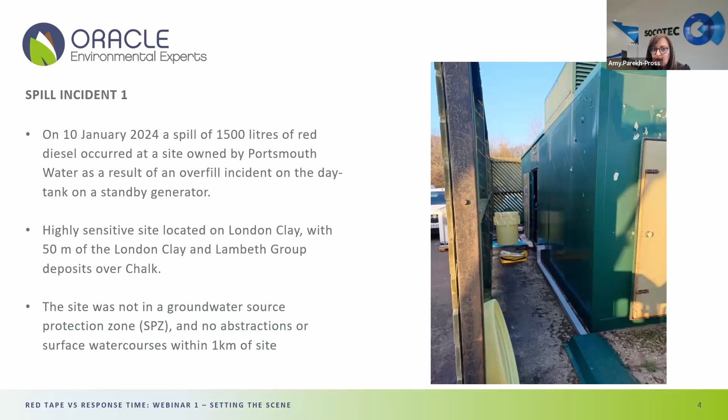So that's a lot of diesel. I mean, we've dealt with bigger, and I'm sure Adrian has too. But it's big enough, and because the site is so sensitive, it's a real issue, and you need to get rid of that diesel as quickly as possible. And I guess because it's the London clay, it's going to be contained probably a lot in those services. So it's just running away. That's exactly it. And on that particular point, the approach has to be breaking that pathway, getting interception trenches in, getting sumps in, so that you can actually start recovering that diesel as quickly as possible.

So we did pretty well in the early stages. So 630 litres of diesel actually recovered from direct pumping from trial pits and interception trenches while we're carrying out that work. And obviously, as you're uncovering that diesel and breaking those pathways, we're installing sumps that allow us to then carry on. Go back into it more. Exactly. So it allows us to then recover diesel and diesel contaminated groundwater as well. So after the first few days, we're left with 770 litres of diesel unaccounted for.

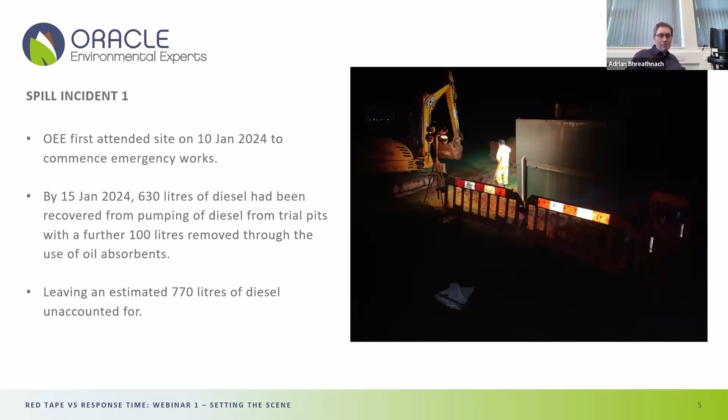So this is just an example of what it looked like. So as Adrian, you point out, there's fast pathways. You've got a really firm clay surrounding these services that have got shingle backfill basically along the services, and it's just going to shoot. Lovely pathway. Exactly.

And for anyone that knows these kind of sites, they're very challenging in terms of the services that you're encountering. You've got a whole array of services, many of which aren't on any plans. So you've got to excavate very carefully, and they're also really critical services, so you can't break through any of them. So it's almost an archaeological dig, but you're trying to get things done really quickly. And you're under the pressure of time all the time. Absolutely. There's a real fine balance to strike, isn't there?

Also, I wanted to ask, did it help that it was a clay matrix? Because from speaking to responders, they seem to say... I mean, yes and no, I suppose. I think yes, in terms of there's no wider migration. You haven't really got a wide plume of diesel on this particular site. It is contained, as Adrian says, within those service runs. And the other issue you've got here, as with many other sites like this, you've got these services, some of which are at 0.5 metres, some of which are at 3.5 metres, and they're all crisscrossing, and you've got numerous directions in which the diesel can travel.

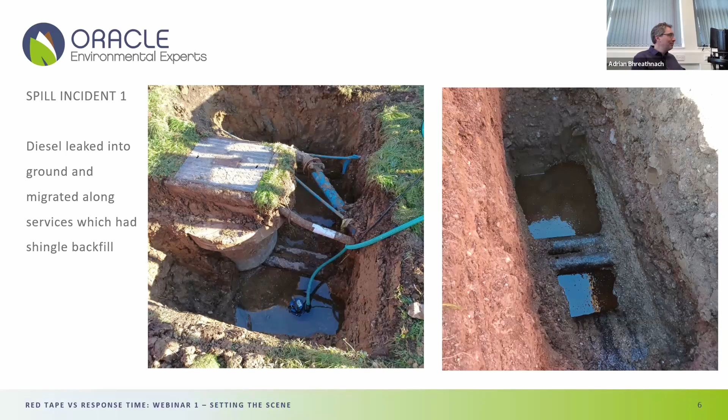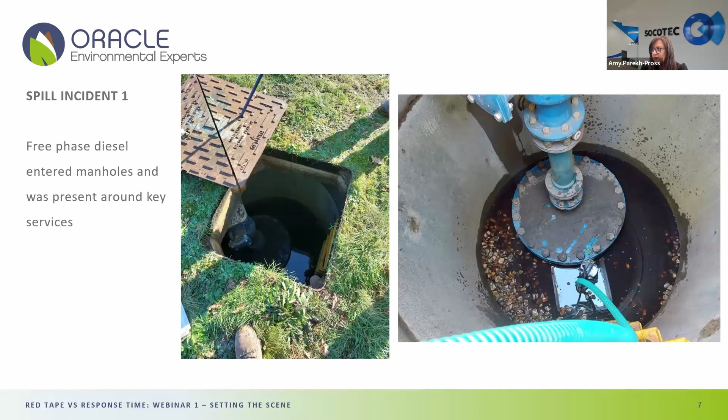Exactly. So this is another example of what we came across. We've got diesel tracking along the shingle around the services, and it's accumulating in various chambers on the site as well. So we're tasked with recovering as much diesel as quickly as possible. We're pumping out from these chambers that you can access, and installing sumps adjacent to these chambers, so that we can stop the contamination from getting into them in the first place.

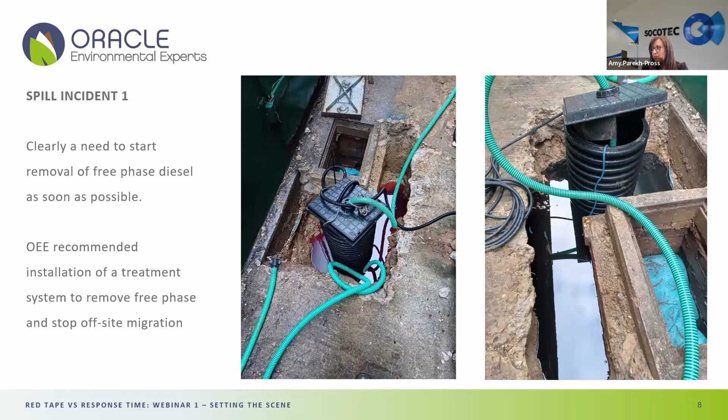So as we touched on, there was clearly a need to start removing that diesel as quickly as possible, and as you can see, lots of it still at shallow depth as we're excavating those trial pits and trenches. So to do that recovery, we recommended installation of a treatment system at an early stage, and these were the key constraints on the site. There was no foul sewer on this site, which was in a fairly rural location. The nearest access point to a sewer was about 230 metres away from where we needed to put the system, and it was on the opposite side of an A road as well.

Another constraint was to have 24/7 pumping to gain control of the diesel and to stop it migrating around the site and also off-site. We wanted to prevent that off-site migration. As I said before, there's no surface waters or groundwater abstractions in the area, so there's low environmental sensitivity as such. And there was lots of land available to allow us to discharge to.

Given the sensitivity of the site, the remedial targets we're working to are going to be pretty stringent. We're trying to get rid of as much of the diesel as possible, and ideally getting it to a non-detectable level within that shallow groundwater in time. And is that a limit you set, or a limit the client set? It was a limit discussed with the client and the regulators as well. Your first goal, as Adrian will know, is to get rid of as much of that free phase contamination as you can, and then look at what's realistically achievable to restore the site to its pre-spill condition if you can. Okay.

So that's the first one. The second example is slightly different. It's a commercial site, and we got called to this site after an incident back in June 2024. This one was a below ground hydraulic hose delivering engine oil from a nearby storage tank, and that was found to be leaking. The estimated volume of engine oil lost was again around 1,500 litres. I'm not entirely sure of the accuracy of the estimate, but that's the figure put forward initially. But as with many of these incidents, you don't get an exact number on day one.

No. And you live and learn as you start breaking ground and operating these systems. It seems to be larger than what we're thinking. Yes, it often is. Was it a pressurised line or was it gravity? I think it was a pressurised line, yeah. So the potential there is for further loss. Yeah.

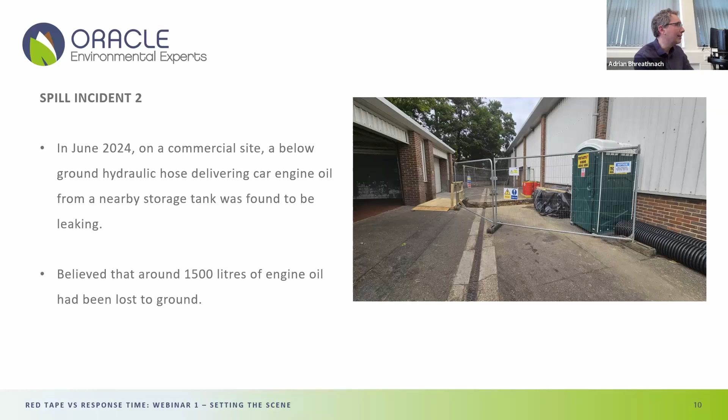So our client on this one was Trinity Environmental, another UK Spill member. Yeah. And they attended site in October 24 after getting all the approvals in place and the instructions through. So they carried out emergency mitigation works at that time, which involved again source excavation and investigation works as well. So they carried out pumping of what they found at the time as well.

So they were recovering the free phase engine oil that was identified on shallow groundwater, and they installed recovery sumps again to enable the ongoing recovery of that engine oil once that initial excavation phase had been carried out. And it was believed at that time, I think, that a large proportion of the free product that had been lost had been recovered. Right. Okay.

No, I think as with many of these sites that we deal with, you do get discoloration of the product depending on what it comes into contact with, and obviously as it weathers over time as well, you get a change in coloration. But no, the analysis that we had done showed that there was only engine oil present. Good.

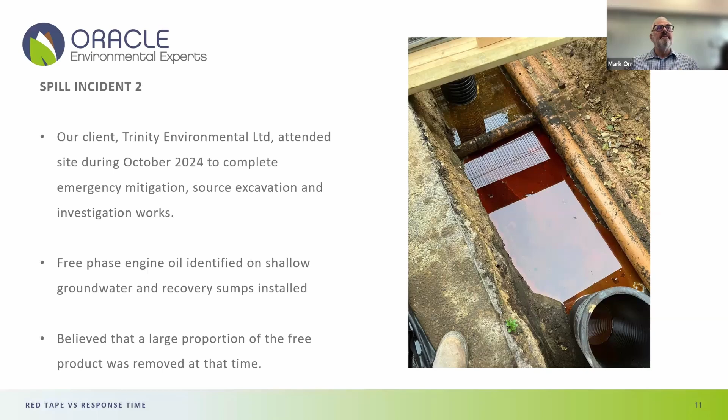Analysis is key. Isn't that right, Amy? That's true. Did I say the right thing there? Well done. Analysis is key.

No, it is key, to be honest, and it comes back to what the client should be paying for as well. Our clients, similar to Adrian, a lot of the time it's in relation to the insurance industry. So it's a specific incident that's occurred, and they're only there to clean up that incident. So you shouldn't really be dealing with any historic contamination that isn't part of that insurance claim. But if there's historic contamination, it brings consequential loss into question, doesn't it? Absolutely. And how much you can get the original spill to deal with the consequences of that loss. A very difficult point.

It is a difficult point, but we regularly get asked, how old is this fuel? Can you age the contamination in the ground? And you do age analysis, yeah. But it's fraught with error as well. It is, because that's based on the microenvironment as well. But you need to know, is it a fresh spill or a historic spill? Exactly. Sometimes it can be 6 months before we get called in. That becomes pretty tricky. Or you've had a slow leak that's been going on for a while, it's been ongoing. So, hugely interesting.

Anyway. Sorry, we digress. That's all good, it's all good. Back on topic, but it's a useful conversation to have.

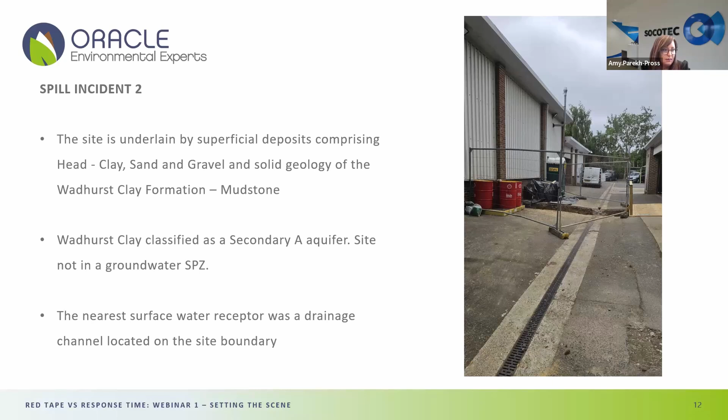So, free-phase engine oil on shallow groundwater. Again, as with the first example, you've got the potential for migration around services. And as an industrial or commercial site, there's a wide range of services crossing the site. You can see them exposed here, crisscrossing the excavation, that act as potential pathways. Did the site have good drawings? Because it looks like a reasonably modern site. It was better than some, I would say.

But there's always the need to progress carefully and carry out a decent survey prior to breaking ground. That's always a key element of any investigation work. Not only does it protect everyone who's actually carrying out the work, it informs potential pathways as well.

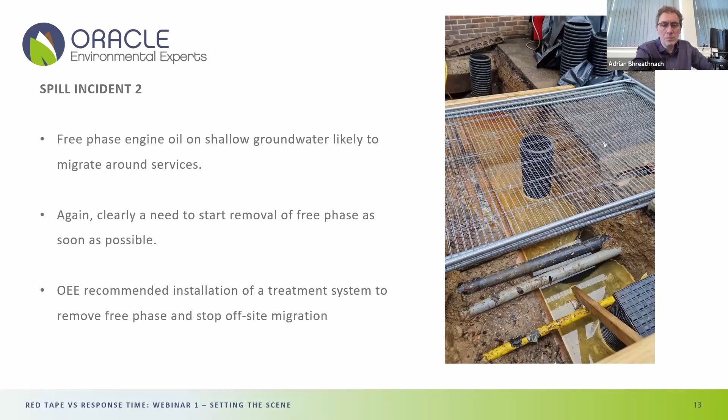So, free-phase engine oil on shallow groundwater again, likely to migrate around services. Clearly we need to get the free-phase engine oil removed as quickly as we can. And so we recommended installation of a treatment system, which was going to remove the free phase and stop any off-site migration as well. So the key constraints on this particular site, it was a working commercial site.

So we had numerous buildings surrounding the affected area, and they still wanted them to remain in operation. There was concrete hard standing across the majority of the outside areas. There was a foul sewer present on this site, so we had to look at the potential for discharge to foul sewer as well. The nearest watercourse was on the site boundary, as I've talked about, and the nearest abstraction, which wasn't really at risk, was 800 metres from the site as well.

So our initial goal was to remove as much of that free-phase engine oil as possible, and then we'll assess the risk associated with any residual contamination, given the fact that it's a working industrial site as well. So we'd expect the remedial targets to be somewhat lower than, say, the first example, which was a completely different level of sensitivity.

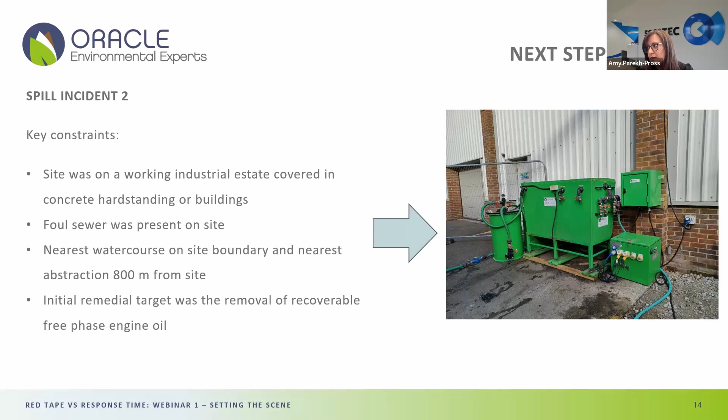So lastly then, the last example is a spill that occurred back in October 24, and this was again 1,500 litres of kerosene this time.

Oh, kerosene. Does your calculator only go to 1,500? It does look coincidental. No, it does. There's nothing deliberate involved, I'm sure. I'm only teasing. I'm only teasing.

So this one was from a failed compression fitting on an oil supply line to a domestic property. So it was on a line then, not the actual tank? Yeah, not on the tank. This was on the line, so you can see it in the photo in the top left there. Really common scenario. We see it on a regular basis. It's just fairly flimsy oil feed lines connected to thousands of litres of kerosene.

I get a lot of calls from homeowners where the tank's fine, but they've got this fuel in the garden, and I say, when is the last time you inspected your tank? And I keep stressing to them, you've got to do a walk round at least once a week. Just check everything's all right. Can you smell anything? Is there any stained grass? Is there any stained vegetation? I know I keep preaching that, but I know some people do.

Probably the 3 of us here all do, because we all live in rural locations, and we see it every week. All I'd say is, anyone listening, if you've got a tank in your garden, go and do a walkover. Just walk the course of where the line goes. It will save you so much. But I don't know whether we're seeing more and more lines going, less the tanks. The tank's been replaced maybe twice, 3 times, but the line has never been replaced. 40, 60, 80 years old.

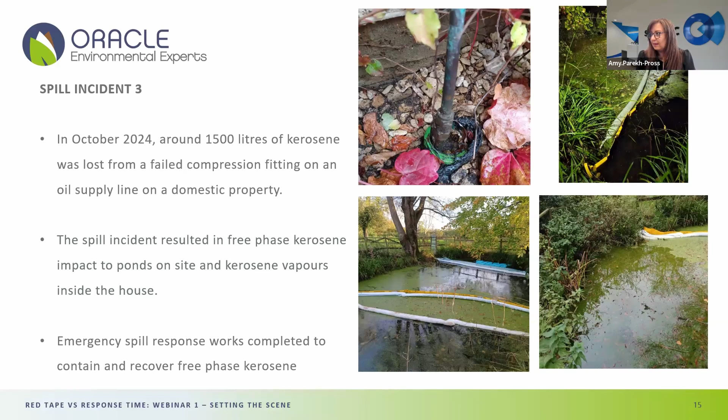So clearly, emergency works needed to get that situation under control. We've got rid of the free phase on the watercourses and contained it, but we want to stop that kerosene getting to those watercourses as well. The added fun and games here was finding free phase kerosene in the sewage treatment plant. Because this is a rural property, no foul sewer nearby, so it's got its own sewage treatment plant.

The photo in the top left shows you the free phase contamination from the sewage treatment plant. So we had to get that pumped out, and we had to keep that going to manage the situation, to stop it getting into the sewage treatment plant, and to stop it discharging at the other end of the sewage treatment plant as well.

Emergency excavation works were carried out as well, and we identified some extensive kerosene contamination on shallow groundwater there. You can see in the photos on the bottom two, that's the kind of pure kerosene we were picking up really quickly. That was in close proximity to the broken fitting. And right close to the house as well.

Exactly. Real worry. A relatively old Cotswold stone property, not much in the way of foundations. So always a challenge, potential for migration underneath it. And were the homeowners still living in there? They were when it happened, but because of the vapours, they had to leave.

The added sensitivity here is that there's a triple SI, a site of special scientific interest, literally next door to the property. Wow. And that was very much a water-based triple SI, so we had to prevent any migration of the kerosene onto that site as well.

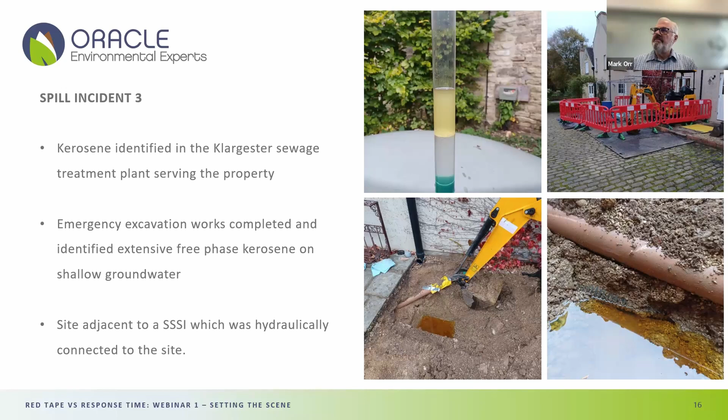So emergency excavation works carried out to chase out the contamination along any drainage routes and to allow installation of recovery sumps, to enable us to start pumping the contamination as quickly as possible. In terms of timescale, roughly how quick to getting these sumps in and starting recovery? Because you're exploring, you're finding your way, aren't you?

Yeah, absolutely. You touched on a good point, because I've got it in my notes here. As with nearly all of these incidents where you're doing emergency response works, you're not only doing response, you're doing investigation work as well. So combining your remediation and investigation is key. In terms of timescales, we're on site day one if at all possible, and we're starting works, if not day one, day two.

And we're recovering directly from trial pits and also getting those sumps installed as quickly as possible. And then continuing to investigate and explore. Exactly. It never really stops, does it, in these spills? Well, it doesn't. You keep looking until you're confident that you've actually captured the plume and you've got the ability to recover it. Otherwise, absolutely, it just runs away.

But that's where the installation of the systems that I'll be talking about in a bit more detail in the next webinar really come into their own. Because if you can get onto site with a system, then you can get 24/7 control of a plume, and that's exactly what you need. And you can start recovering and removing that fuel from the ground. And taking the risk. Just risk management, risk mitigation.

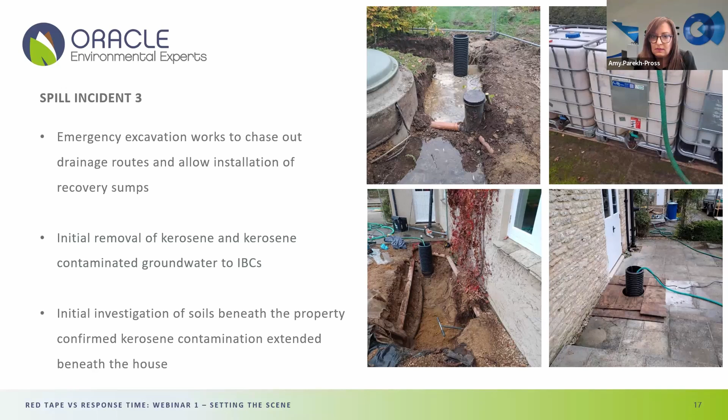So sensitivity then, touched on it already, but the site itself is underlain by alluvium of the Northmoor sand and gravel member, and it was classified by the EA as a secondary A aquifer. The bedrock geology is not as sensitive, that's mudstone, so you've basically got gravels overlying the mudstone there. And through those gravels you can get some really rapid transport, as you can imagine. So again, the emphasis is on getting that control so that you stop it getting through those gravels into watercourses and out to the SSSI.

It was in a groundwater source protection zone, but it was a source protection zone 2C, which are not as common as many others. That's where you've got an aquifer at depth that's basically being abstracted from. So it's not directly at risk from contamination in the shallow geology. So that's subsurface activity only, that one. And the SSSI is 150 meters to the east of the site, with direct hydraulic connection between the two as well. Right.

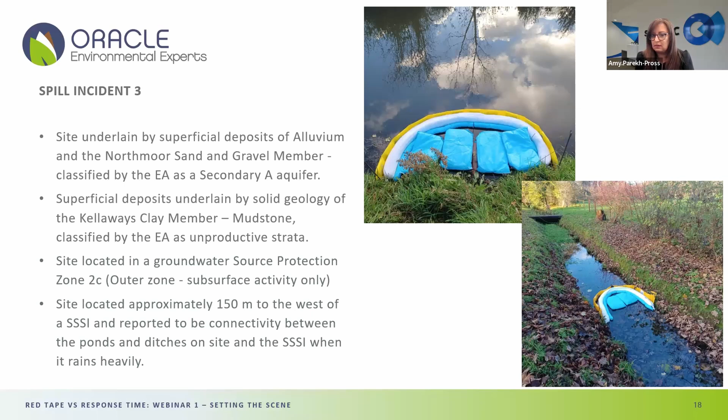We touched on this earlier. I think we mentioned rainfall. So rainfall can affect these sites massively. These watercourses here, particularly the one at the bottom, were maybe just above ankle height when we first attended, and then after some significant rainfall, suddenly it's waist deep. So you need to ensure that whatever response measures you put in place can adjust for that kind of scenario. So make sure you've got your booms on compensators so that they can rise and fall with any changes in water level.

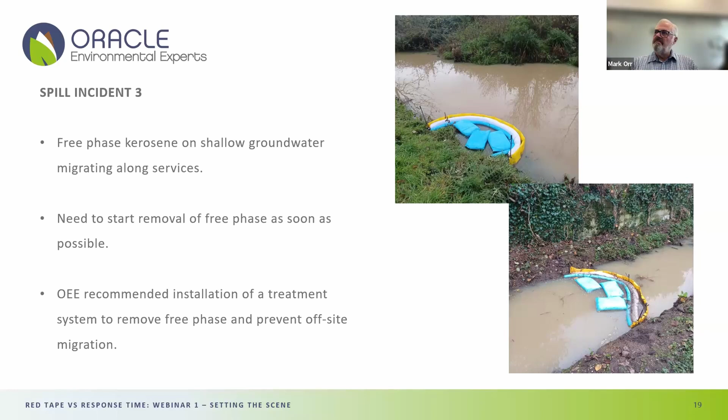So we needed to remove free phase contamination as quickly as possible, as with all these incidents. So again, recommending installation of a treatment system quickly to allow us to recover that kerosene as quickly as possible. Key constraints on this site then: no foul sewer in this rural location. So there's got to be another way in terms of arranging that discharge. So we needed to commence recovery as quickly as possible to get control of that kerosene plume.

In doing that, you're actually preventing impact to the house, to the sewage treatment plant, and to the watercourses. So it's a win-win-win. And obviously preventing the risk to the SSSI. So the initial target for cleanup works was recovering that free phase contamination. And ultimately, the works are actually still ongoing, so we'll assess the ongoing risk associated with any dissolved phase to those receptors, such as the house, human health, and the environmental receptors as well.

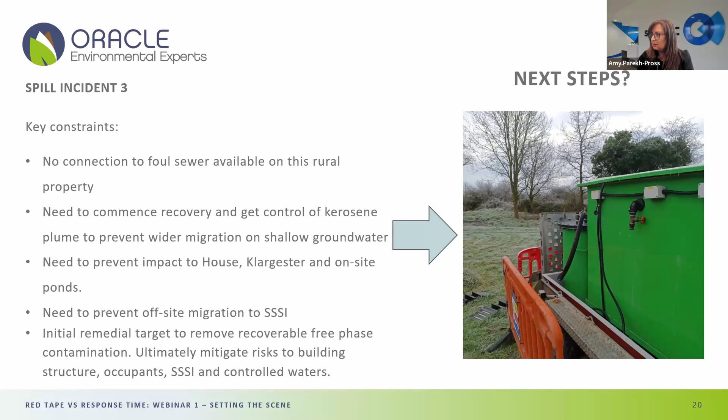So that's the three sites in terms of setting the scene. So a quick summary slide here. And yes, you're right, 1,500 litres on all of them. Consistent. Very consistent. Really? It's happened. Okay. So there are some common themes among all three sites. You've got free phase contamination, engine oil, diesel, kerosene on shallow groundwater, and because of that, it's relatively easily recoverable. So whenever I see pictures like I've shown here of pure kerosene in a hole, I'm thinking, we've really got to start getting that out as quickly as possible.

So that's essentially our goal then, is to get a system onto these sites to get that contamination under control and to start remediating as quickly as possible. And that's going to be the subject of the next webinar. In that webinar, are you going to explain the components within a remediation system, just for those who don't understand them? It's going to be touched on.

Because for some people, it's very easy to say, we're going to put a remediation system in. Yes, but actually, it'd be good to know what the components are. Absolutely, we can certainly cover that. I mean, the real focus is on how the regulators have approached the clean-up in terms of allowing us to carry out those works, with the emphasis on showing the pressures in terms of timescale and cost that come with trying to install systems like what we're talking about.

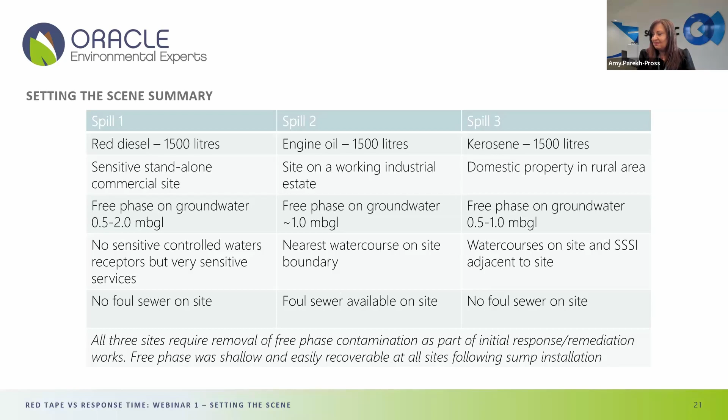Hi, Anthony Futige is my name. I'm a senior environmental scientist at Thrive Science Limited. Spillage and contaminated land has been my specialty. So thank you for that presentation. I was just wondering, the remediation target was just to scoop the free phase oil. Was there any intrusive, more detailed remediation target with respect to lines of evidence to show that the contaminants were within acceptable levels? Mark, would you like to pick that one up?

Yeah. I think the answer to that is that they're all live incidents still. In fact, for the first example that I showed, we have put forward a proposal for using bioremediation in situ, and we're waiting for feedback from the client to see if they would like to implement that. Particularly with the first incident, as I mentioned in the webinar, there's going to be some stringent cleanup criteria. So there is going to be something else that needs to be done in terms of polishing and treatment of the dissolved phase.

So in situ bio was deemed to be the most acceptable solution, because things like chemical oxidation could affect the surfaces. You've got a combination of steel pipes, plastic pipes, and various flanges and fittings which could be affected by peroxide or other oxidants. So in that particular one, we have proposed further polishing. The other two are still too fresh, so to speak.